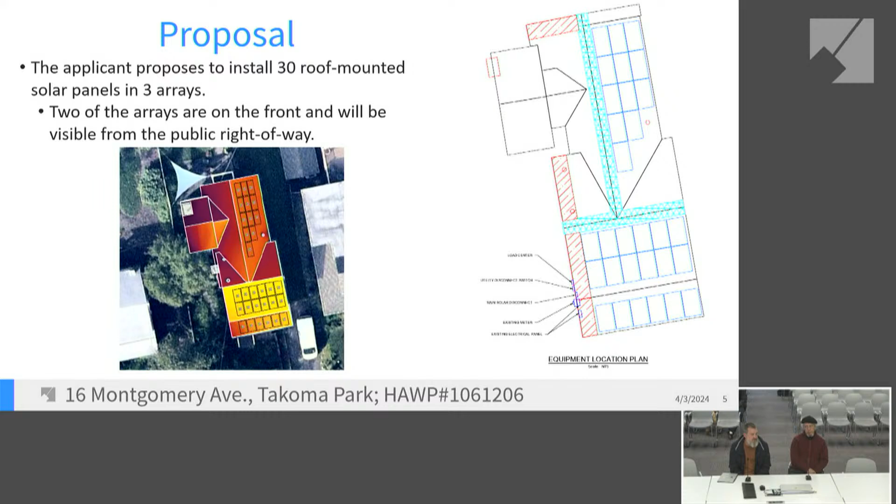We evaluated that location. There were two problems with that location due to the required fire setbacks, which are not indicated on the equipment location plan. But if you can imagine a 3-foot vertical bar on the edge of that roof, and then again across the ridge, that leaves us with space for maybe 2 panels. And when we place panels there, as well as the west-facing roof, we looked at that as well. Due to that large tree just to the west, those panels perform very, very poorly. As part of our process, we do on-site shade analysis, so we created a LiDAR image with a special type of drone that allows us to analyze every surface for efficiency, and that section just wasn't viable.

Aren't you allowed to cut? I just want to remind folks, we're no longer in the question section, we're in the discussion section, discussing whether to approve this or not. Oh, I'm not allowed to ask questions now. We're finished with that section, unless someone has a burning question they'd like to ask.

Okay, my comments are, I don't want them on the porch roof. I was just asking if there might be another place they might put them. Thank you, anyone else?

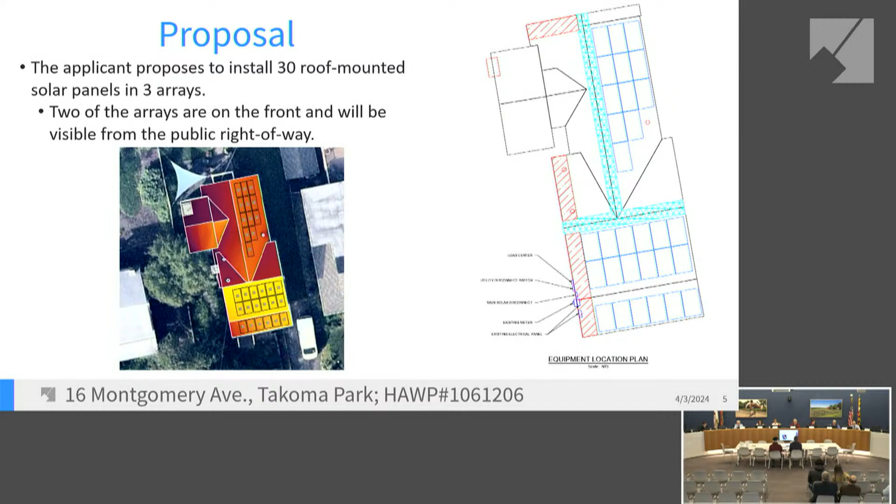Would anyone like to- Chair Sutton, this is Commissioner Dominiani remotely, if I could also contribute to the discussion. Yes please, thank you. Yeah, I also, as other commissioners have noted, I have a couple of heartburn issues with the panels along the porch, the 1x6 array front facing.

And I'm wondering if perhaps there's a condition in order to make this more aesthetically pleasing or more centered, if instead of having these panels be 6 panels across on the front facing slopes, they can instead be 5 panels across and then centered appropriately, so left can accommodate the setback required by the county, and right can have a matching setback just for aesthetics, and if perhaps that can soothe some of the concerns by switching those arrays to 5 panels rather than 6, and then being centered relative to the front of the home, if that would be more aesthetic.

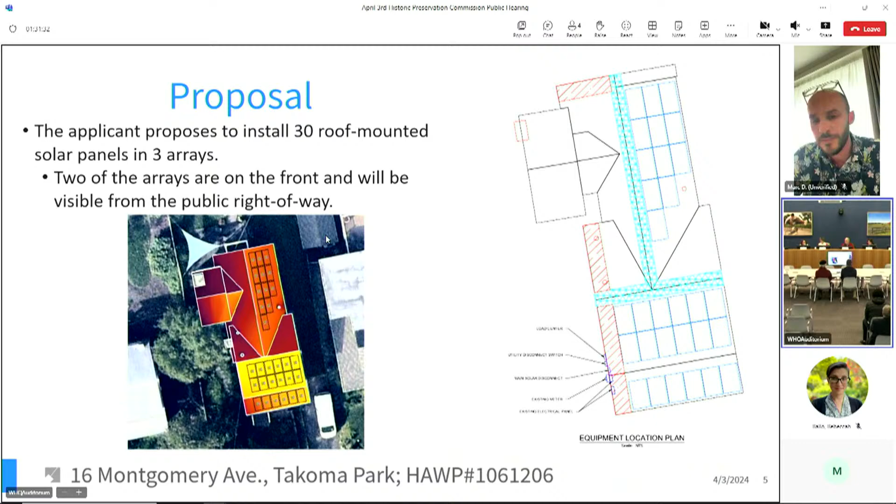Thank you, okay, anyone else? Would anyone like to make a motion?

This is Commissioner Burdett. I make a motion for HAWP number 1061206 at 16 Montgomery Avenue, Takoma Park, and I move to approve the HAWP with one exception to the conditions provided by staff, and that would be to limit the number of panels on the front porch roof to 5 panels and center them on the porch roof.

Is there a second to the motion? This is Commissioner Dominiani. I would second it.

Any more discussion on the motion or the second? I would like to do a roll call, starting on my left. If you could say yay, nay, or abstain, I would appreciate it. Abstain. Abstain. Yay. Yay. Yay. Commissioner Doman, nay. Commissioner Dominiani, yay. And I, as chair, vote yay as well. So we have 1, 2, 3, 4, 5 yay, 1 nay, 2 abstentions. The motion carries.

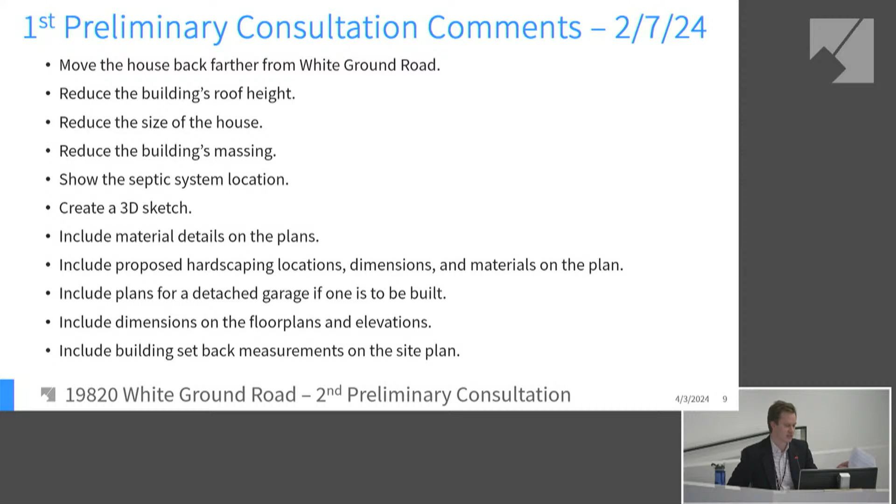The plans were revised, and the applicant provided the following summary of all the changes that they made. First, the building was set back approximately 150 feet from White Ground Road. Roof trusses were engineered that lowered the building 12 inches into grade and set the building at a lower contour, which reduced the building's height.

The building's square footage was reduced from approximately 4,259 square feet to 3,689 square feet. On the front elevation, the right side of the house was set back an additional 6 feet. A service entry porch was added with a pent roof and brackets. Portions of the right side elevation were removed and 2 additional turn gables were created. Shutters and traditional trim were added on all the elevations.

On the left side elevation, an exterior stair was projected and a single window with shutters was added. A gable was also added. On the rear elevation, the turn gable was simplified and exterior doors were changed to paneled doors.

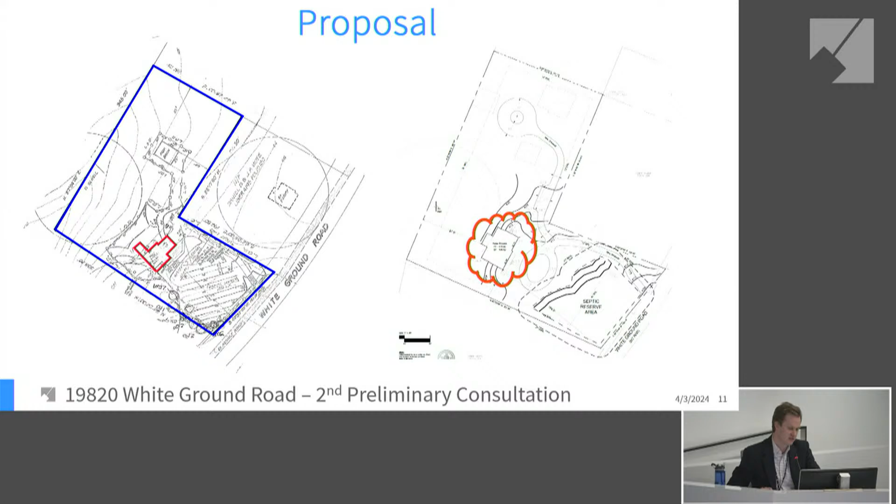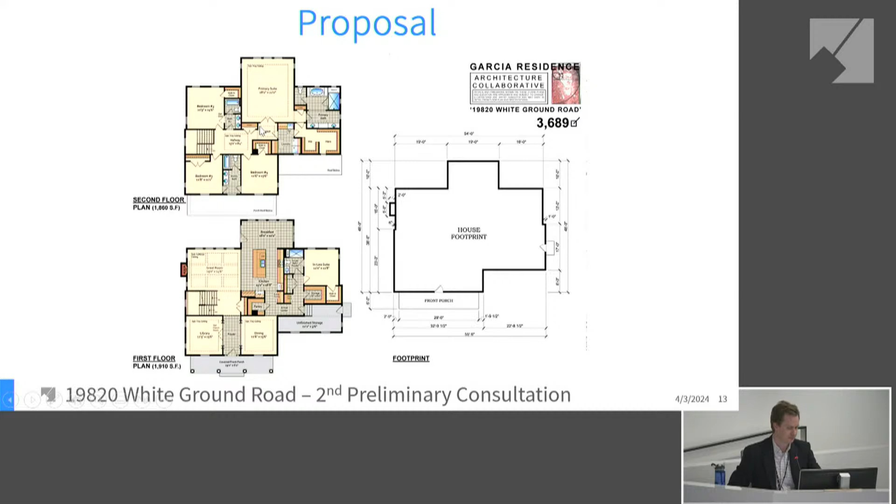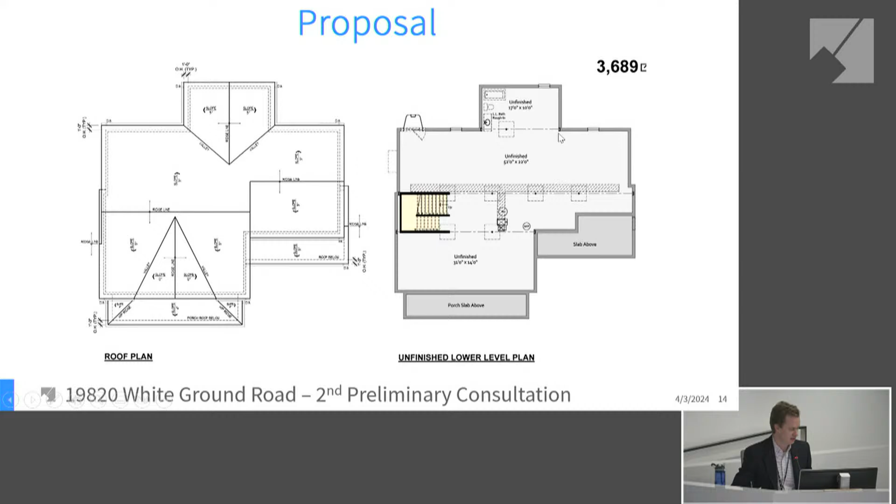To summarize staff's findings and recommendations, we support the new proposed location set 150 feet back from White Ground Road. The applicant has reduced the size of the wing and made it subservient to the main core of the home, but it will still be taller and about 5 feet wider than the wing on the design approved by the HPC back in 2002. The applicant is not required to copy the design approved by the HPC then, but the design is the framework for what would be compatible for the property.

The Board of Appeals decision in 2002 set the permissible boundaries for an appropriate size and massing for a new house on this lot, and the proposed design, while smaller than the previous submission, is still not in conformance with these size standards, so the side addition or the wing should be no wider than 18 feet.

The centered gable is currently proposed to have a rectangular vent, but could be a character-defining feature similar to those found in other centered gables in the district. The inclusion of brackets or other decorative trim along the eaves could also add visual interest to make it more compatible with other homes in the district, as well as a small chimney could be added.

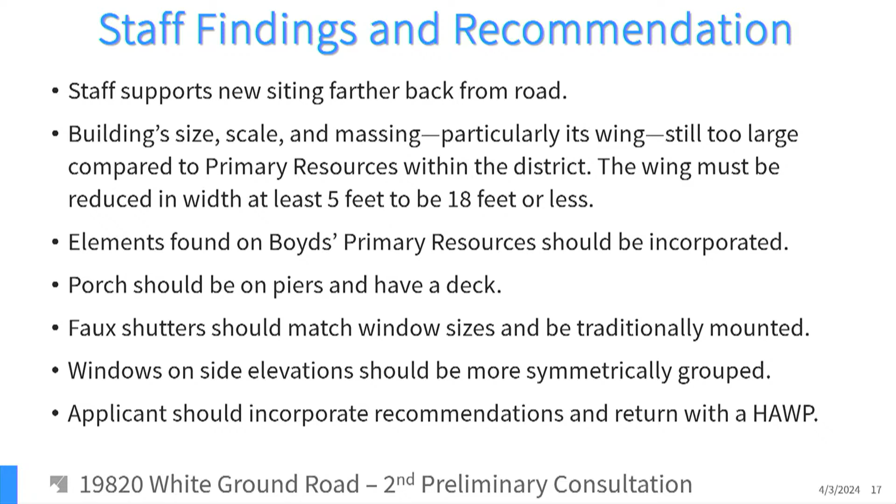We request your feedback tonight on the following: the appropriateness of the house's siting, the appropriateness of the house's size, scale, and massing, particularly for the side wing, the appropriate driveway materials, traditional Boyd's Historic District design elements that could be integrated into the design, alternatives to the vent, the rectangular vent proposed in the front centered gable.

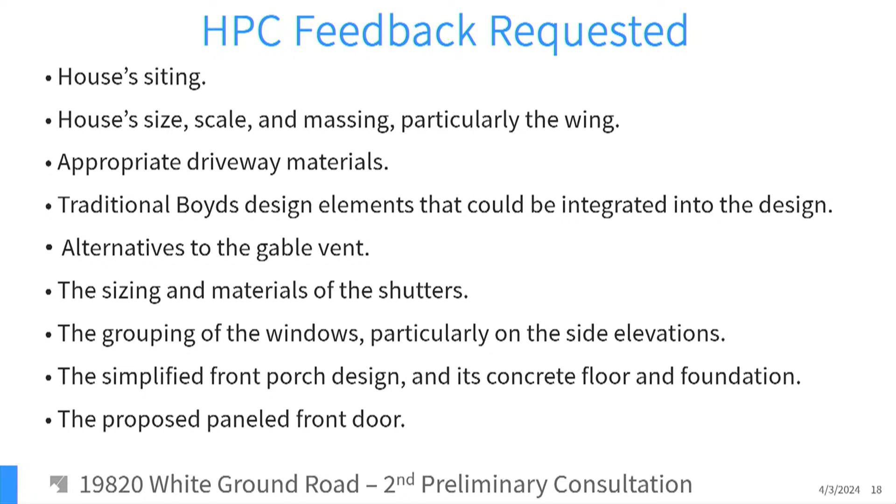The sizing and appropriate material of the proposed shutters, the grouping of windows, particularly on those side elevations, and the simplified front porch design and appropriateness of its concrete floor and foundation, and the proposed panel front door.

Any questions for staff? Any questions for staff?

Commissioner Doman: Thank you for the long information, very, very informative. Could you fill myself, I guess maybe in the staff, about how we are still committed to the findings from the 2002 Appeals Board and how that affects us? Are we still bound by that? Could you fill the commission in on that, please?

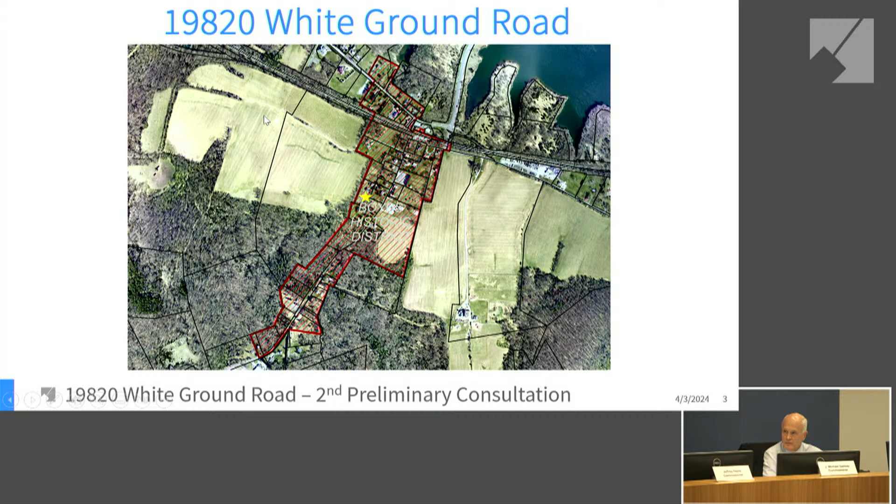Other questions for staff? Commissioner Galway: other than the 18-foot limitation on the side addition, is there any other dimensional limitation the Board of Appeals put on the house, for instance the overall width side to side? The question appealed to them was the length of the wing, so that was specific. It was not appealed the size of the main core of the house, which I would guess is approximately 30 to 40 feet. So the house that was approved is a close approximation of what is proposed as part of this application.

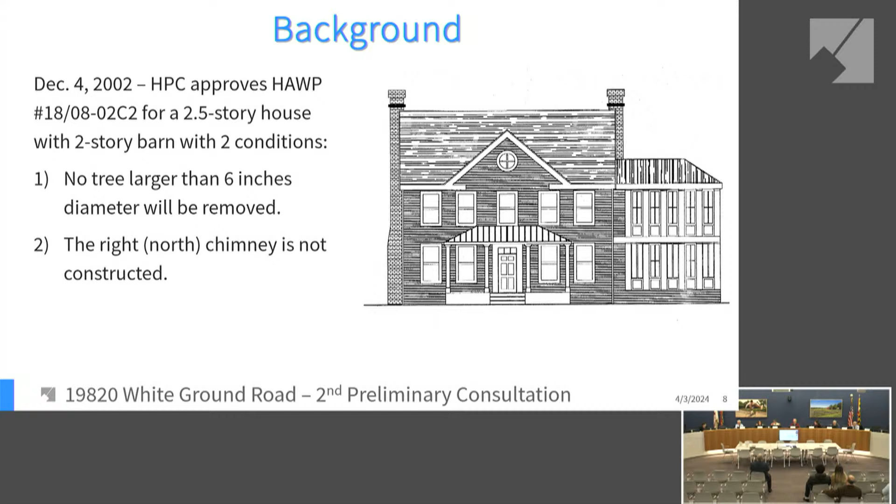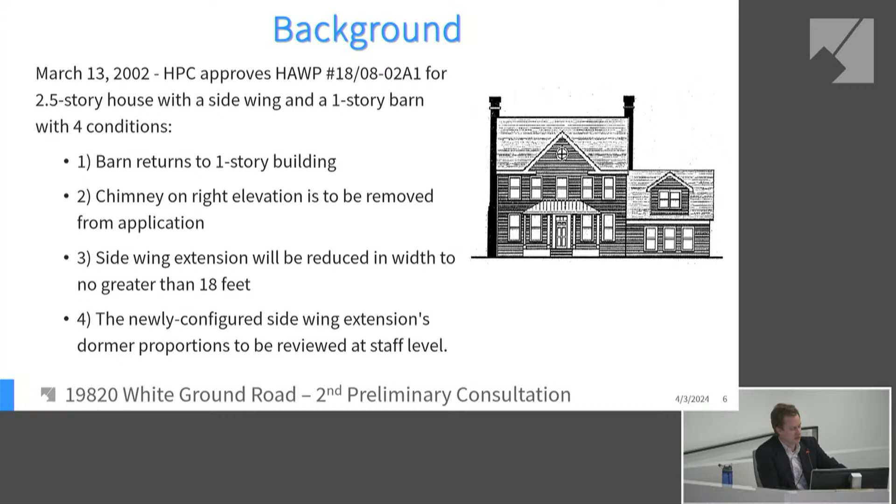Commissioner Pelletier: going back to the original presentation, even before the appeal, in 2002 I thought you said the side addition should only be one story. I'm curious how the addition went from one story to two story and was approved last time. I believe you're referring to the barn proposed as part of that project. Yes, it was the barn that the HPC initially said had to be one story, and then the Board of Appeals said a two-story barn is okay. Oh okay, never mind, thank you.

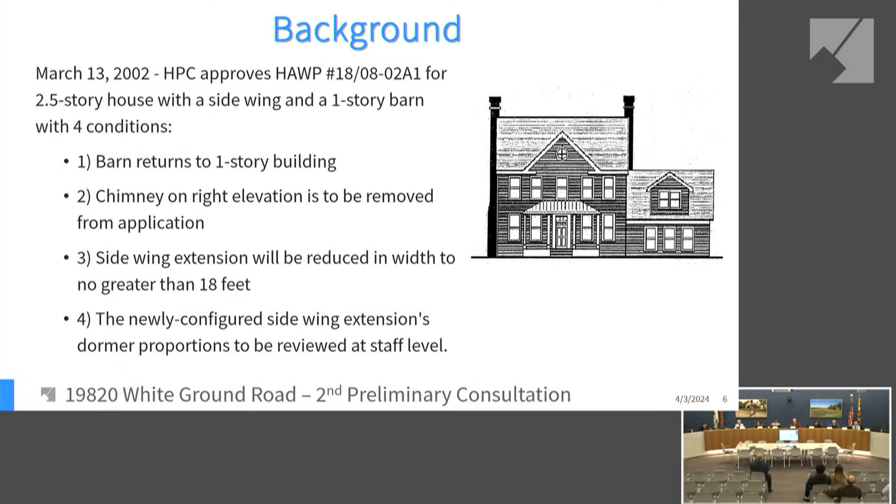Any other questions for staff? Commissioner Burdick: looking at the aerial view that shows the proposed house and its driveway along with the three houses that front the road, is the proposed little CAD image scaled appropriately compared to those three houses on White Ground Road, or close to it? When the applicant's architect has the opportunity to speak I'll ask them to answer that. I can't answer that exactly, I hope it's scaled, but they can confirm.

Speaking to the three houses we see, two of them are somewhat similar in shape, looking like four-squares, though the roofs are a little different, a red roof and a silver roof. Is that form typical in Boyds? It's been long enough, I don't remember if the vision calls for that. Most of the properties are either gable-roofed or hipped-roofed like what you see. The red roof appears to be a gable roof, this one is a hip roof four-square with dormers, and there's a cross gable over here, and another hip roof. So hip and gable roofs seem predominant in the district, making the proposed house rather atypical. There are a lot of cross gable roofs in the district, especially closer to Clopper Road, which isn't visible on this map, but there's a lot of center gabled cross gable roofs over there. Still, there are also a number of hip roofs as well.

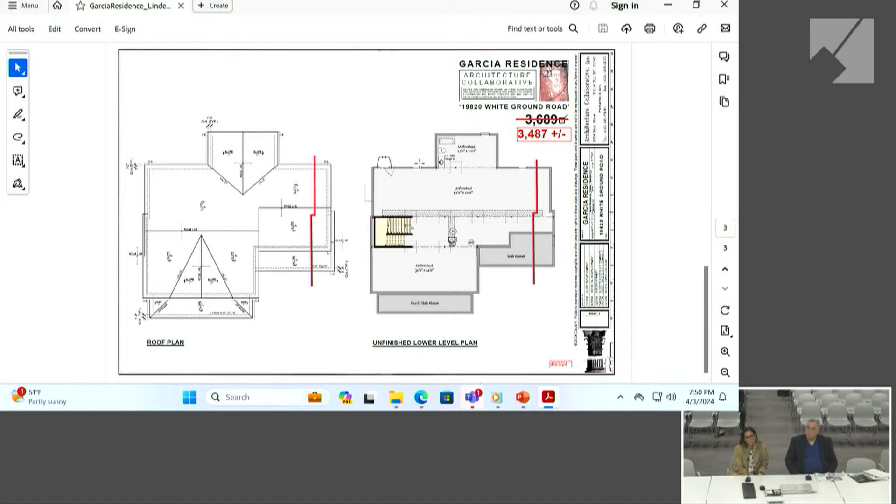And does anyone have any additional comments for us? I believe someone had a question that we hoped would be directed to you. I don't remember who asked the question, but someone was asking a question of staff that should be referred to the architect. So whoever asked the question, if you could.

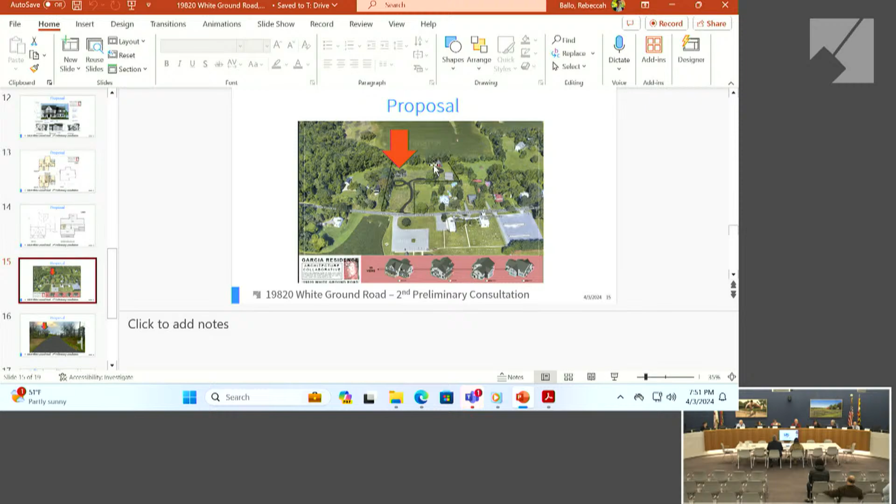This is Commissioner Burt, that was my question. I was just wondering if the scale of the CAD image in the aerial is scaled. Oh, it's to scale. It is to scale to the other houses that are the actual existing historic houses.

That is a yes? And on my, we had very limited development on the sketch you're looking at. So I can't answer the question right now. I will get back to you with an answer to make sure that what you're looking at is in scale or not.

I think the very first image that we showed, showing the 150 feet back, in the video showing the distance of the drive and the location of the house, it's so far back from the road, it's going to be very difficult to notice much of the house. You probably won't, you'll probably be seeing maybe from the second floor and above. And I'd already stated that.

Is this the image, is this the actual design of the house? Yes. Superimposed on this image? Yes. Okay, thank you. Any other questions? Yeah, Commissioner Doman.

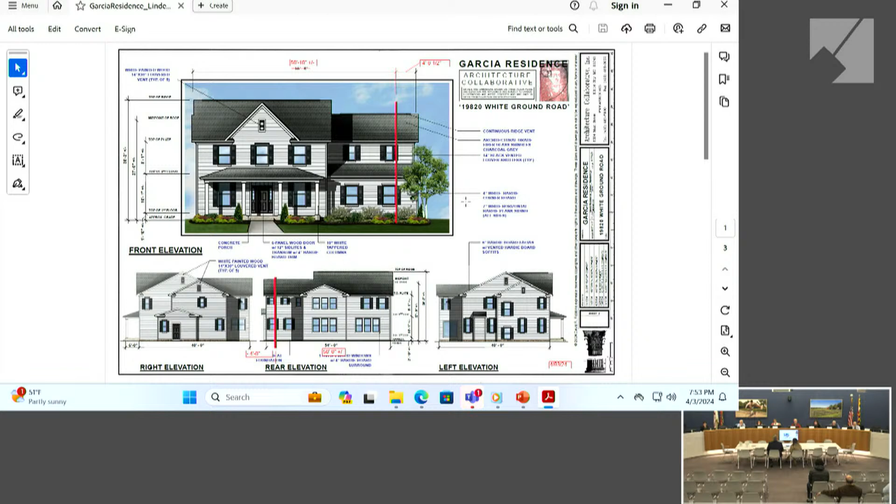Okay, so this is the first time I've seen this particular drawing. Has staff, is there a new footprint? Do you have a floor plan too? Yes, I redlined the package showing what we would do.

Also, you can see by the square footage, we're down to 3487. When you take away the in-law suite, you're probably at a house in the 2000s, which might be a little large for Boyds, but as far as the rest of the county goes, this is a very moderate house in this county.

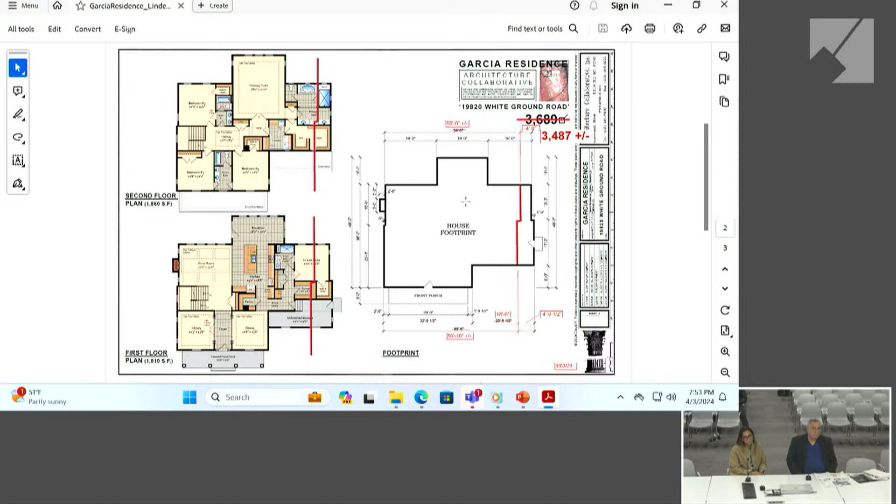Okay, I appreciate this. I hadn't seen it, so now that you did actually correct the drawings and brought that wing in, I appreciate you addressing the issues. These were brought up at our last HPC meeting when you were present, and I know you worked with staff on this, so I appreciate that you've taken the recommendations into consideration and come back with a new proposal. I appreciate all that.

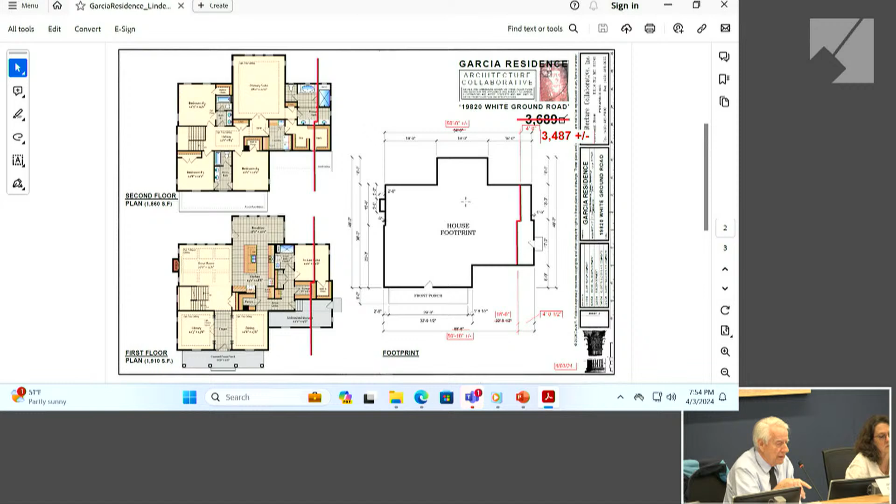What is the driveway? There was one of the photographs that showed a proposal. Is that just gravel with tar on it, or is it blacktop? Do you know what that is?

We have a really long driveway because we're going to use one of the barns as a garage. We want to do, at the beginning of the parking lot, asphalt, or what they call blacktop. In the back, we're going to do gravel.

Is this something that's similar? Do other houses have this, or do the other houses have more of a rural approach, like just a gravel driveway going up to the house? There are a couple of houses that have blacktop, but most of them are gravel.

Okay, thank you. Any other questions? Okay, would anyone like to start the deliberation? Oh, I'm sorry, is there another question? Chair Sutton, this is Rebecca. I do not have any questions.

I did want to bring to the board's attention, and I am on this Teams meeting, so I can try and share my screen, and I hope I don't break it. I want to bring everybody's attention to the Vision of Boyds document, which has a lot of background information that Vice Chair Burdett was asking about.

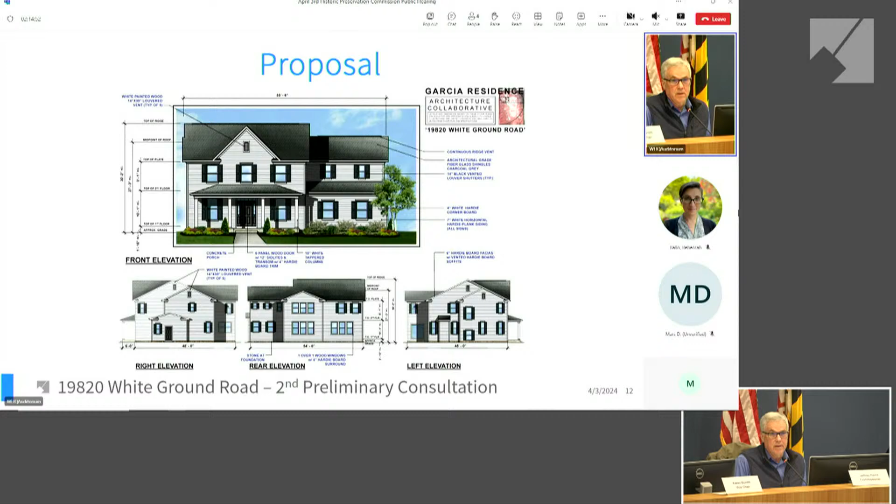Jeff, Commissioner Haynes. Very briefly, I kind of agree with my fellow commissioners' comments. I just wanted the notion of getting down to the details. One thing that jumps out to me is the front of the house architecturally is taking its clues from rural farmhouse architecture. But as we go to the back, it looks like a 1980s suburban tract house on the backside.

That's based on the roof pitches and the fenestration, and I think the house should be more architecturally holistic. So the character of the house in the front should carry through on all sides, and I don't think that does that here, particularly the back. What jumps out is the master bedroom roof being a shallower pitch roof versus the front gable, which is probably at least a 12 and 12 pitch. You might want to think about carrying that pitch to the back, and also the fenestration, the triple windows. You might just have one or two very large double hung windows and try to be more architecturally appropriate to the period of the rural farmhouse.

I appreciate that you're willing to scale the wing down. I still think you can meet your program requirements by doing that. The master bedroom's really large. I don't know what you have planned for that, but it's larger than your great room. So you should be able to reduce that and get your master bathroom closets the same size and work that out. So that's all, thank you.

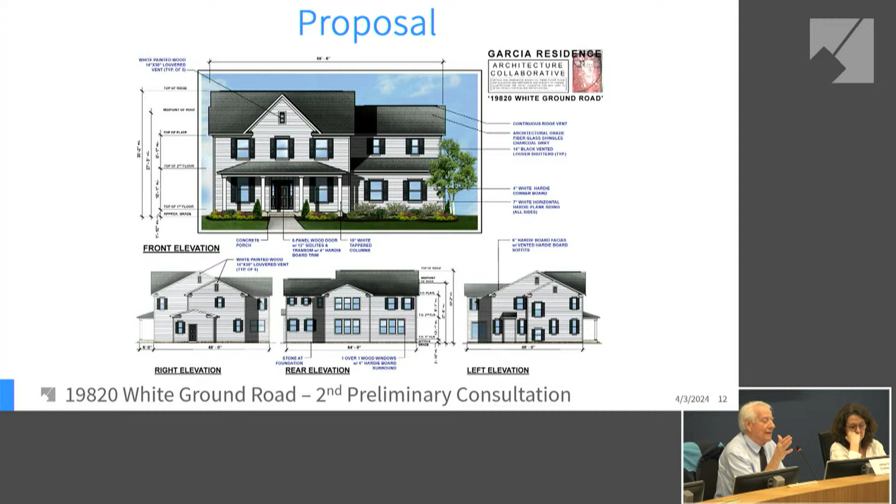Oh, the other thing I was going to say, I didn't see it in the Boyd's area, but in some Gothic architecture, the frieze boards on your gables, on your overhang, generally have a little bit of detail to them, kind of like a little scalloping detail. I think that would add a little pizzazz to the house if you wanted to try something like that. You would see that in design books anyway, a little detail on the frieze boards. So this is just an idea.

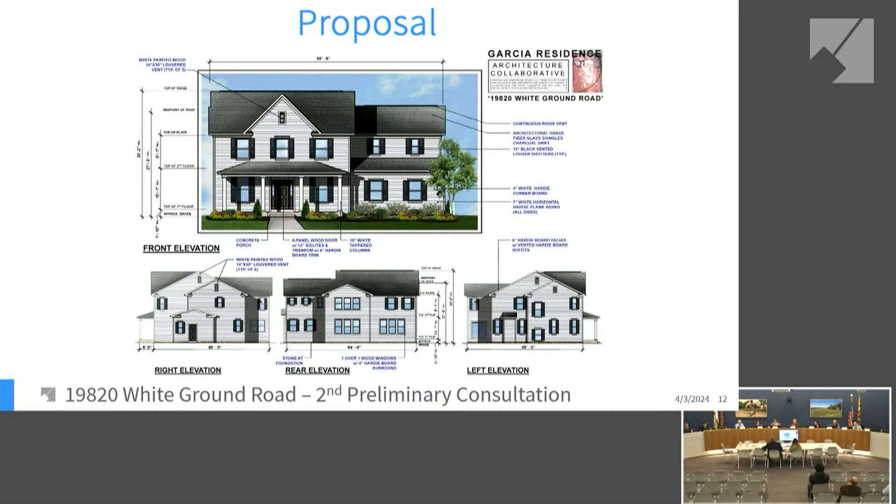Thank you. What else? I want to make sure I get Commissioner Dominiani if he'd like to add something, and if not, that's fine as well. Thank you, Chair Sutton. I would like to agree with the comments the commissioners have made. I have nothing else specific to add.

Thank you. Well, I think you've done a very good job of addressing things, and I think you hopefully have enough information that you can continue this and very soon bring a historic area work permit to us. And I think it's going to be a wonderful addition to the district.

Thank you so much for the work you've been doing on this. If I may add one more comment: we have gone through 6 or 7 reiterations of the facade. The only reason I'm bringing this up is to address the comments you just gave me about the window in the gable, a fancier vent, a different front door, and a different type of house.

I do appreciate your comments, and I do want very much to accommodate some of your needs and desires and do what's best for the community. But some of the comments that I'm getting now are different from the comments I've heard over some of the earlier applications we've made.